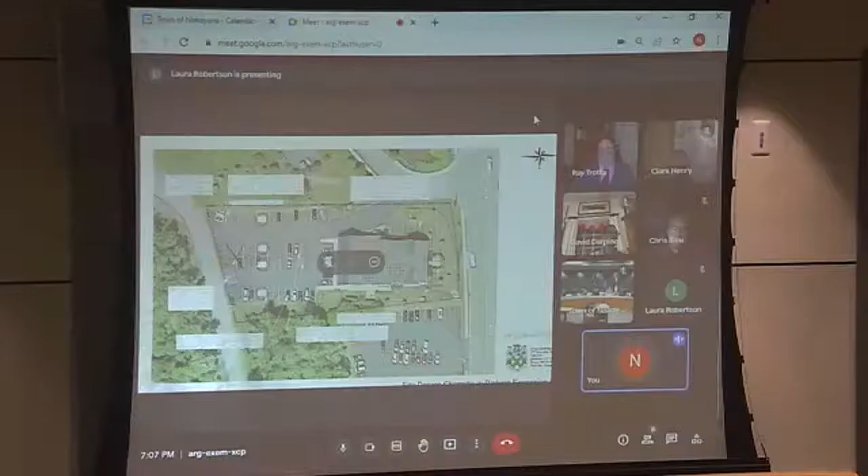So looking at it, and Mr. Trotta can jump in, what he's looking for is to use 12,184 square feet of the project. Is that correct, Mr. Trotta?

That is correct. I wanted to let you walk the board through it, but I could give you the presentation on where we were last week and where we are now. The only update is I had in-depth discussions with the owner as well as the broker for the owner, which is the realtor, so I know where we are at the moment and what we'd be requesting from the board this evening. I wanted to quickly walk you through some of these slides because they're really for reference, kind of where we were last week, rather than going into depth on where we are now.

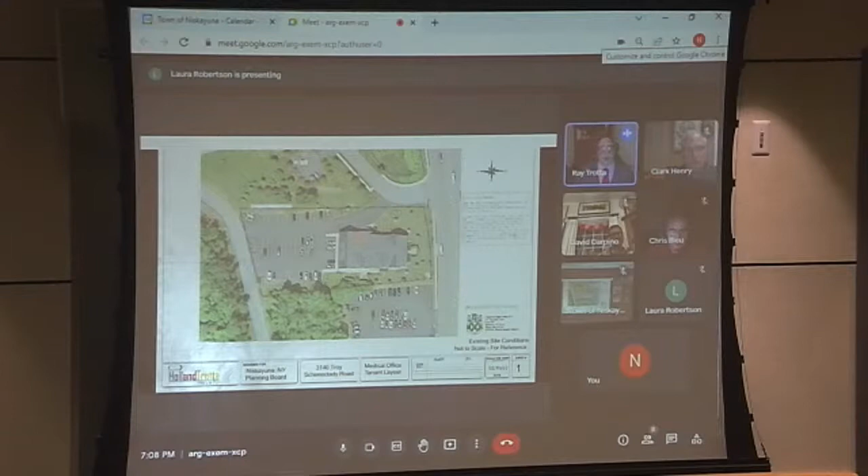So as we were presenting, the first slide is just the existing site. It gives a little more detail than we talked about, and we brought it up on the aerial, but it shows the property line and the right-of-way line and the vicinity. However, as an aerial photograph, it's at an angle, so it gives an approximate location of where everything stands. One thing to note is that at the front and the sides there's a fairly significant slope going from the driveway coming in from Troy Schenectady, as well as facing Troy Schenectady Road and the backside of the building.

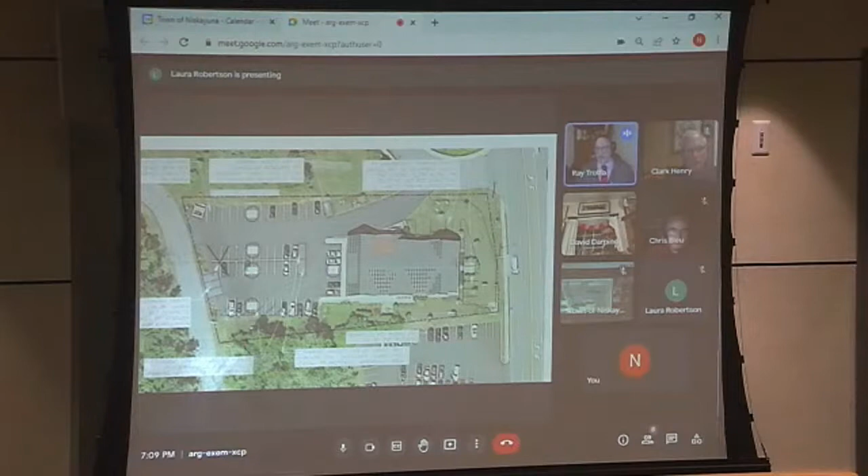I wanted to bring those up, and I wanted to skip slide 2 if possible. The reason is because we'll come back to that, since that's basically where we're at.

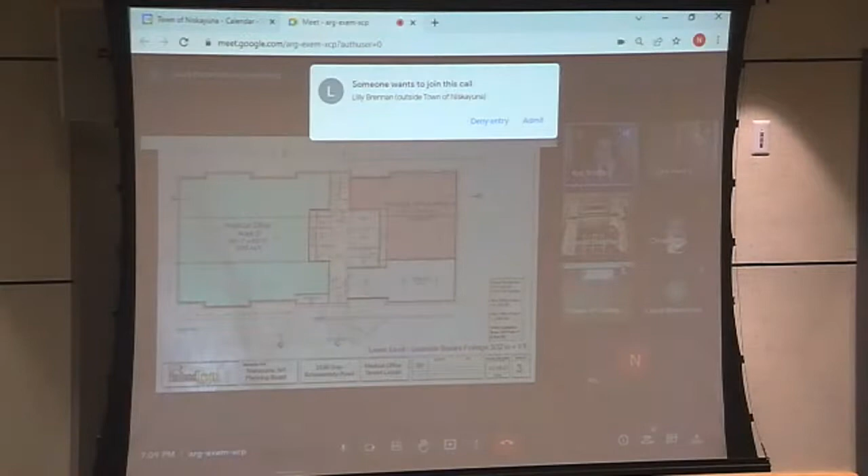So slide 3 and 4, I wanted to explain that we went in depth with Laura, and Clark was instrumental in navigating the waters of what the code reads word for word on how the area is calculated. We went in with the assumption that we were looking at occupied area, or if you will, leasable area. The reality is the zoning code is based on gross area. The difference between the two is that gross area is to the exterior footprint of the building, and occupied area is typically what a building code uses, or leasable area, which excludes any spaces not occupied for periods of time, meaning corridors, stairwells, elevator shafts, storage areas, those kind of things.

So that being said, everything we're showing in slide 3 or 4 was where we were calculating to get our parking calc in line from what I was presenting last time. It's kind of null and void, if you will.

So the basis of slide 5, which I provided to the board, is that national standards are based upon occupant load, and that's based on 222 square feet per parking space. That comes very similar to where we are, because we have 56 existing parking spaces—actually 55 striped, but there's one parking space that wasn't striped, next to the dumpster. So let's say 56 existing parking spaces, and the national standards get to 55 by the overall square footage of occupant load. Now, I don't want to spend a lot of time on this because as a board you really can't approve something that doesn't meet code and isn't consistent. So I get that. I just wanted to show you because the question was asked how we came up with the calculation, but I don't want to go into the weeds on it because it's really irrelevant at this point anyway, if that makes sense.

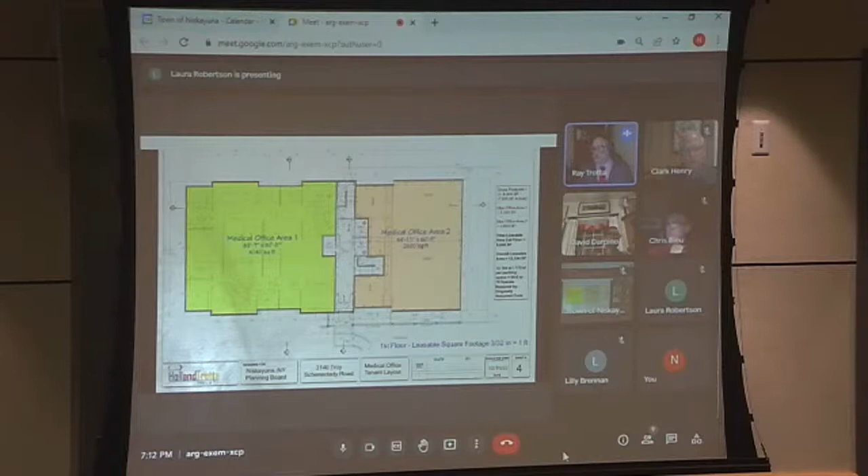So I wanted to go to sheets 6, 7, and 8, which are really the existing elevations of the building as built, and photos of the existing building that we brought up last time, so everybody understands that on sheet 6, the bottom elevation shown on the right-hand side is where the parking area is.

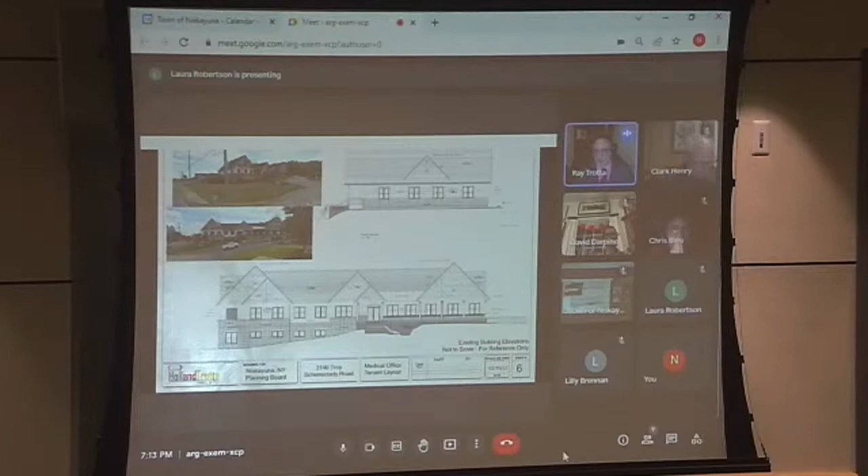And then as you travel down the site, this is the driveway, the main driveway coming in, you can see how the building progresses down into grade. So we're at a full 2-story at the left-hand side of the elevation shown. I wanted to show everybody so they can see it in context, that this bottom elevation shows the grade on the side and how it's progressively going down. The top elevation, which is the south elevation facing the parking lot, shows that it is a single story facing the parking lot.

Now, if we flip to sheet 7, it's the opposite, the mirror image of that elevation. So on the north side, which is facing Troy Schenectady, it's actually a full 2-story. You can see to the right of that elevation that it shows a significant staircase and the landing that comes into the main building. I just wanted to put that in context.

The other part of this, can we stay on sheet 7? This is a footnote we'll go back to. On sheet 7, the side facing the parking lot, as you can see in the photo as well, and this is the adjacent neighbor's parking lot, not our parking lot, on the side of the building, you can see there's complete access. It's maybe 4 or 5 feet exposed, and then it goes all the way down to about 11 to 12 feet at the far right side, which is the east elevation.

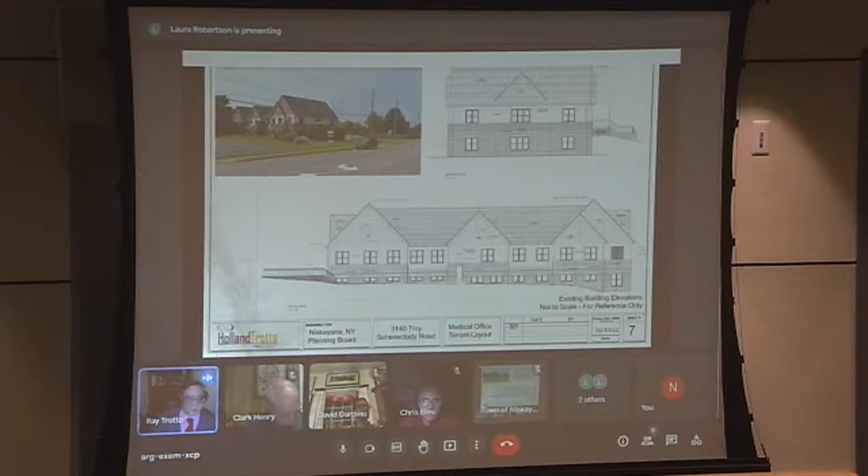On the west side, if we could go back to page 6, it shows that when you're coming up the driveway, that side at the lower level really has no natural light because it's underground. So what I was getting at is the east elevation has complete natural light and access, while the west elevation at the lower level only has half of the building exposed. The reason I bring that up is it's a footnote for when we get to the later sheets showing exactly what we're trying to accomplish here.

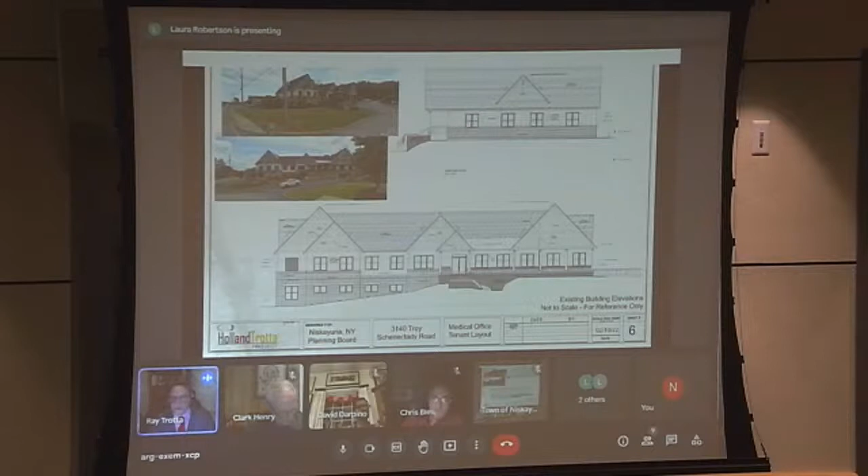If we could go on to sheet 8. Sheet 8 is just a very simple building section overall and 2 wall sections. The reason I show the 2 wall sections is the one in the middle shows where that paving line is or where that landing is, and the one on the side shows the full 2-story. So everybody has for reference and understands what this building is, because I know it was a little confusing until we started looking at the photos before.

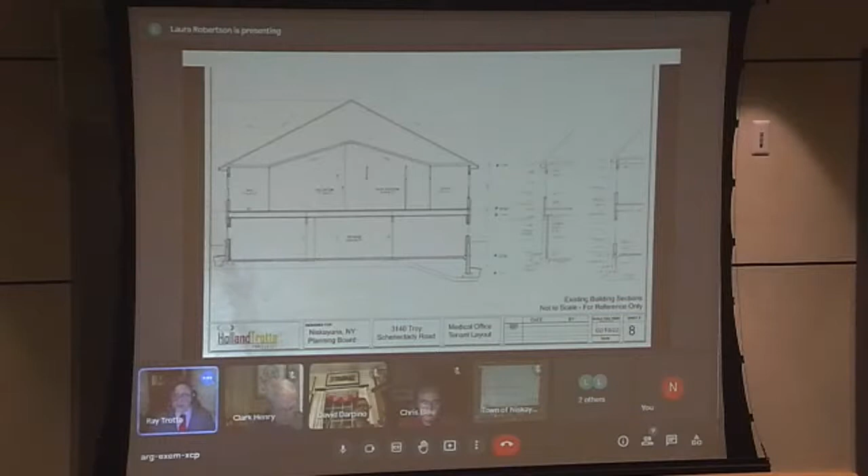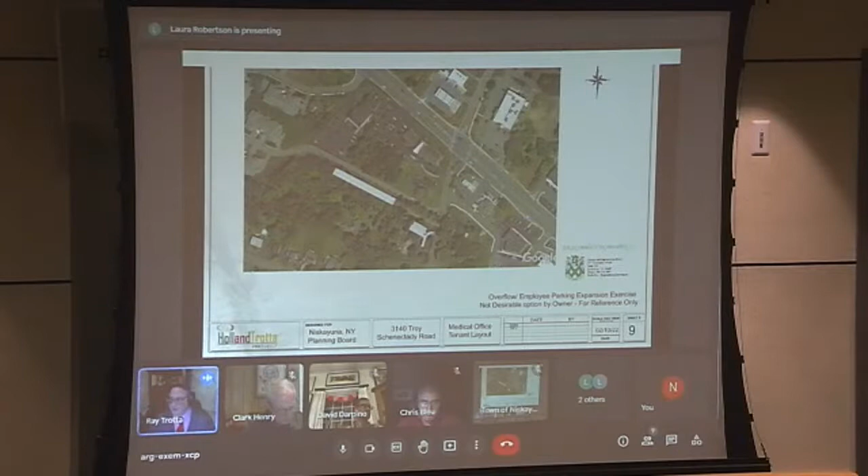Now if we go to the next sheet, sheet 9 shows what was requested on Vly Road, the property owned by the business operations manager for this facility. It's approximately 900 feet door to door, meaning from when you get out of your car to walking in the building. Obviously you can see it's a little shorter than that if you're comparing it to someone parking in the parking lot compared to walking down the street or parking in it. Now, we picked up 7 spots in there, but I do want to say that is a possibility.

However, I would recommend, and the owner even asked the question, that we don't do this route, because the problem is in the future, if he ever wanted to sell that house, now you're selling a residential house that has a parking lot tied to a commercial building. So even though you could have an easement, it just gets a little muddy. And right now everything works great. He's the business operations manager for the facility, but if something happens, something changes, I really don't think this is a viable option, in my professional opinion. But I did want to show the board where it was in vicinity, because we did bring it up.

So can we flip to sheet 10? Now let's get to the nitty gritty. So as we were saying, sheet 10 and 11 are what we are proposing.

Now, the reason why I say what we were proposing, and you're going to ask what was the change - the change was I advised our client, we talked through, and at this point they're okay with something, and this was talking with the realtor as well: they have 2 tenants interested in the space. They do not have 3 tenants. So it makes no sense to go outside and get a variance and go through different challenges when we don't need the space at this moment.

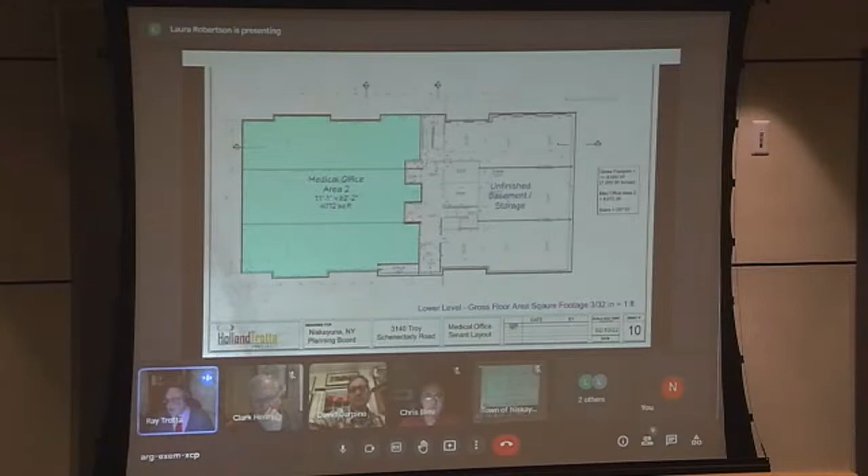Now, one thing that is kind of questionable, but Clark and I decided to go on the side of caution, is we counted the elevator and stair towers twice - on the main floor, the first floor, and also on the lower level. Normally you wouldn't do that. However, we did because your code does not specifically exclude them. So we just wanted to make sure that we don't do something that is not compliant with other projects you could look at, and just wanted to be in compliance on that route.

So if we could flip to sheet 10 - I changed this to 11, I apologize. Medical Office Area 1, this is the first floor. This is the entire footprint of the building, and that entire footprint basically comes to 7,885, which is underneath that 8,000 square foot original approval. The reason why it's not exactly 8,000 is you could see the little jigs and jogs within the building, so it never comes out to exactly 8,000, but we're underneath that, so it's compliant.

But what we're looking for is the 12,224 square feet divided by 175 per code, comes out to 69.85, or 70 spaces required. So now, if we go back up to sheet 2.

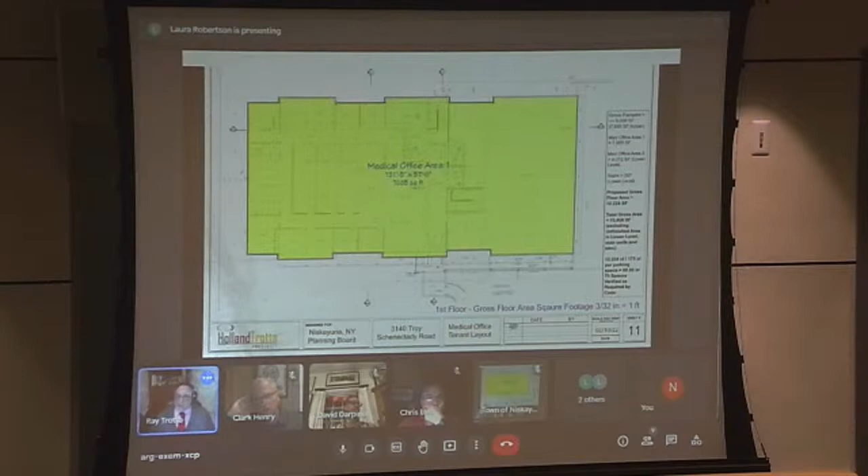So sheet 2, how does this all work? Right now we have 56 spaces. And if you look at 56 spaces, it includes the one by the dumpster that you can see that little white line.

But we also have opportunity on the other side of where the dumpster is, where those 15 are. Originally I showed 2 spaces on our presentation. I went a little conservative and only showed 1 because there's a stormwater inlet to the right of that space, and we didn't want to impact the catch basin by suggesting we could pave that area. The other 2 spaces are in the parking field, basically the island, if you will, is the existing island we could convert to parking.

However, that increases the impervious area, and obviously it's more beneficial to have a nice curved island in there. We are also able to accomplish on the right-hand side of this - obviously there's a slope going down, but if we got rid of all the landscaping and grass in the front and side, we would be able to add an additional 11 spots. So if you take those 11 spots, plus the 2 that are the curved island, that gives you 13, and you take the 1 additional space at the end of the aisle coming in from the access, it gets us to 14.

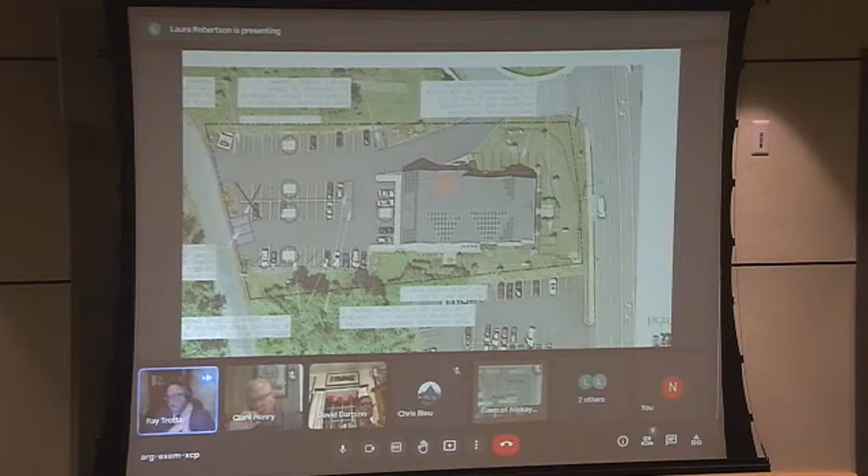That being said, I know it was a lot to digest, but I wanted to make it as quickly as possible so you can understand where we're coming from and what we're requesting to the board.

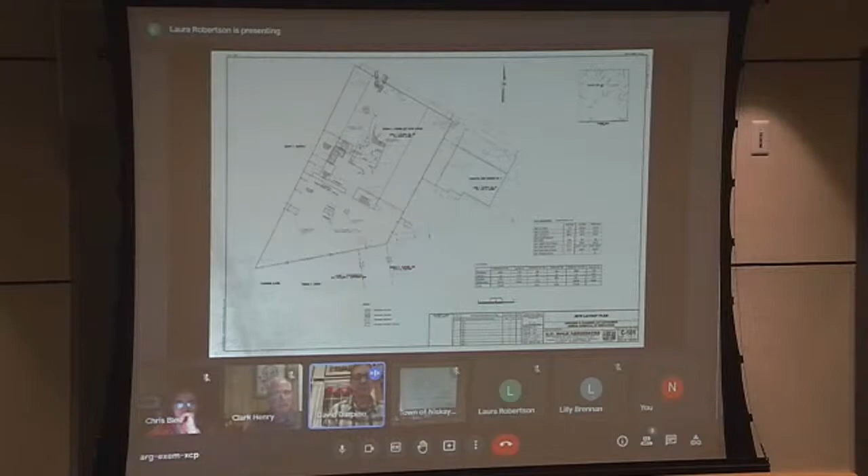Okay, perfect. So, yeah, well, congratulations on your purchase of the business. And we're excited to keep the veterinarian hospital there and work within the parameters of what was approved not that long ago.

I think some of the other information the board should know is that the timetable we've seen with some projects where things started pre-COVID have been postponed or delayed for numerous reasons, whether that's funding, staffing, or materials becoming harder to get in a timely manner. We've been working through those. I think this project probably experienced quite a bit of that.

Towards hopefully the tail end of COVID, I think it's reasonable to go with a 2-year plan. However, within that 2-year plan, I think we should establish a few milestones that would show there's a commitment to moving forward with the project.

We've done that on a couple past projects, and I think that would be helpful just to keep the project not only on the town's radar, but to show the commitment that this business is going to expand the way it was envisioned about a year ago.

Okay, and by milestones, I think in the past, like applying for building permits, something along those lines. Is that what you're thinking, David? Correct.